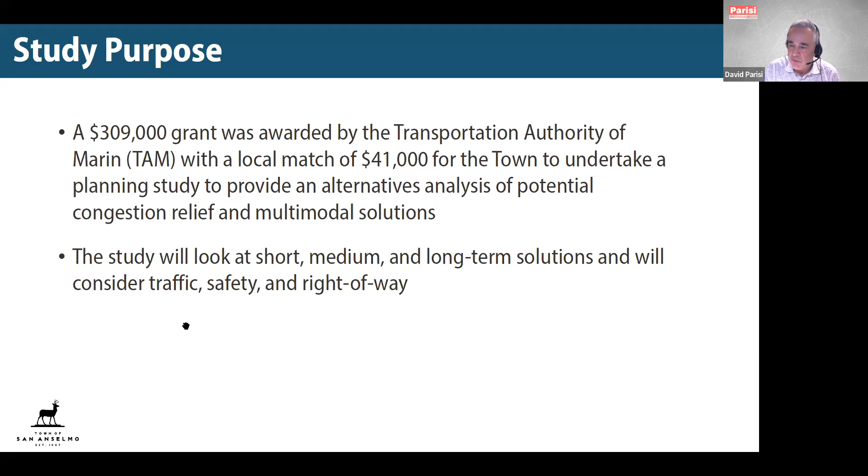At the end of the day, we're looking at short, medium, and long-term things -- concepts that can be implemented in the short term, in the next year or two, as well as a blueprint for future options that may be more expensive and take longer and more funding to implement.

Our goals: number one, to relieve traffic congestion or manage traffic congestion to the best we can, improve pedestrian and bicycle connectivity and safety. We are also looking at public transit improvements, and developing solutions that actually can be implemented, if not in the short term, at least in the medium to longer term.

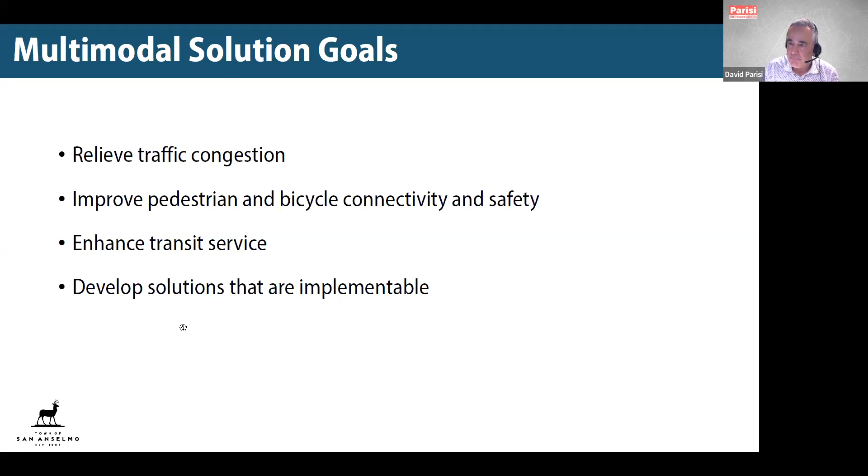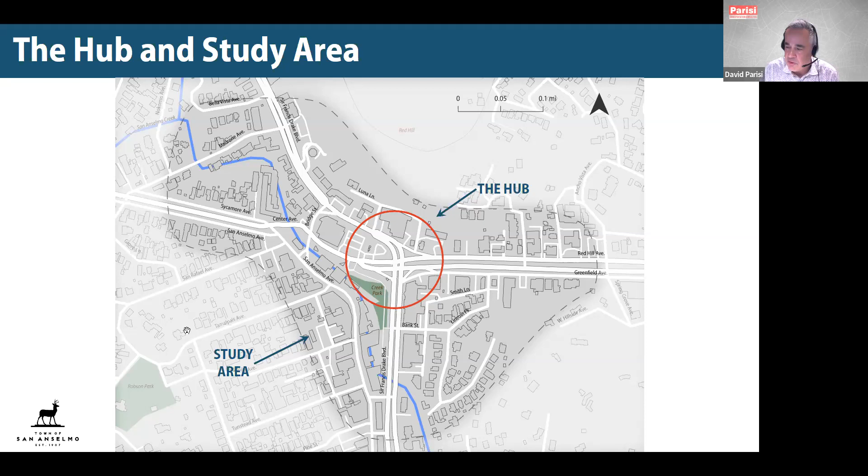This map shows you the hub itself, which is at the crossroads of Sir Francis Drake Boulevard, Greenfield Avenue, Red Hill Avenue, and Center Boulevard. There's also a larger area that we're studying, because we know some traffic avoids the hub today -- not just automobiles, but bikes, pedestrians, and even buses have been rerouted. So we want to understand the effects and the pros and cons of the different options, not just at the hub, but on some of the local streets and intersections as well.

The last time we met was in May of 2021, and that was to really solicit ideas from folks about the biggest issues and concerns, and help formulate the goals and objectives for this study. We have spent the last 9 months very busy mapping the area, understanding where utilities and property lines are, collecting traffic volumes including historic ones, looking at travel patterns, and developing ideas for the different modes and starting to evaluate those. So there's been a lot of work done between the last workshop and tonight.

After tonight, and after your feedback, we'll be preparing a report that will go to the town council for a presentation of some of the findings and near, medium, and long-term recommendations.

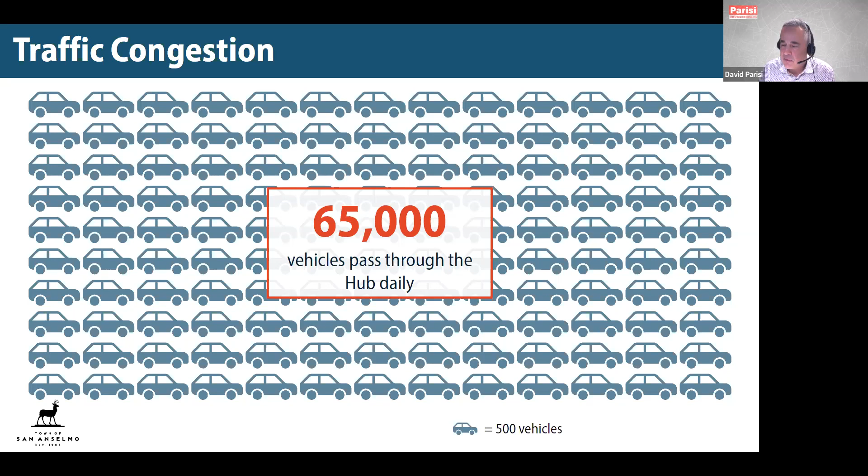Okay, thank you. We're going to recap what we know about the hub with some of the existing conditions for all the different modes. There's a lot of cars that travel through this intersection on a daily basis. 65,000 cars, on our pre-COVID counts, travel through the hub on the 4 legs coming through the hub on a weekday. That's a lot of traffic. In fact, almost 2 times the current population of the city of San Rafael travels through the hub each day.

And it carries so much traffic that we have some little factoids here: about 1.7 times the number of vehicles traveling westbound on the Richmond-San Rafael Bridge, and over 1.2 times the number traveling south on the Golden Gate Bridge. So almost as much traffic as on the bridges.

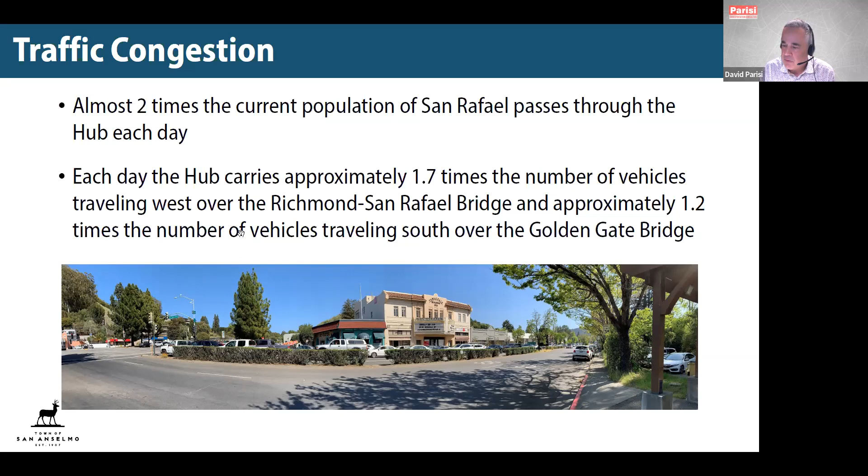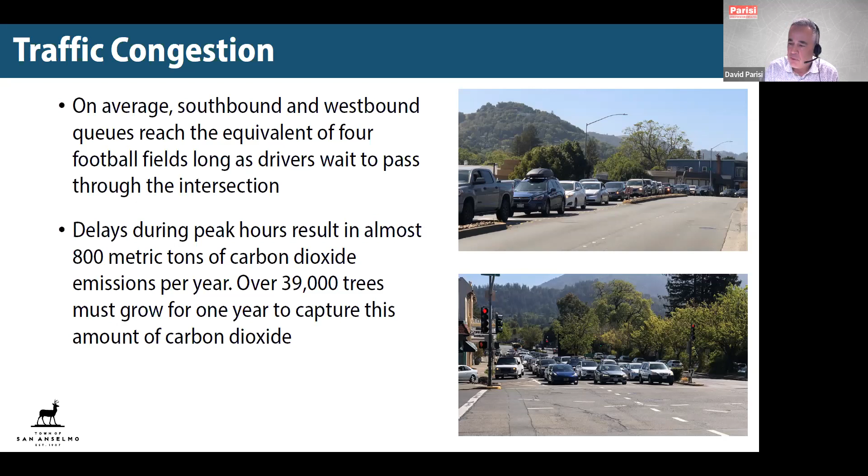We also know that, on average, and sometimes this is exceeded, the southbound and westbound traffic queues reach the equivalent of 400 yards, or 4 football fields, as drivers are waiting to get through the intersection during weekday peak times. This can result in a lot of carbon dioxide emissions, 800 metric tons per year. And if we convert that to the number of trees that must grow to capture this amount, that's 39,000 trees just in a year to capture this amount of carbon dioxide.

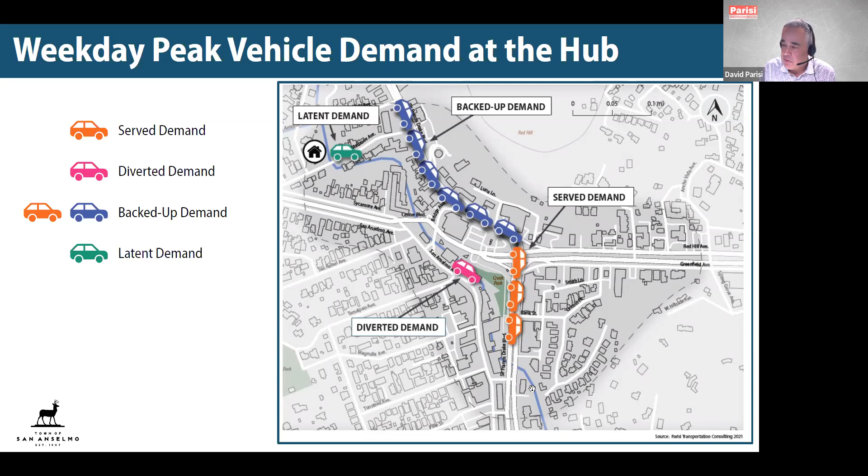As a four-legged intersection with left, through, and right turn movements, it serves 12 different movements. Some of these are bigger than others, and some are controlled with a traffic signal. Others are allowed to make turns on a yield condition, such as the northbound right turn from Sir Francis Drake Boulevard onto Red Hill.

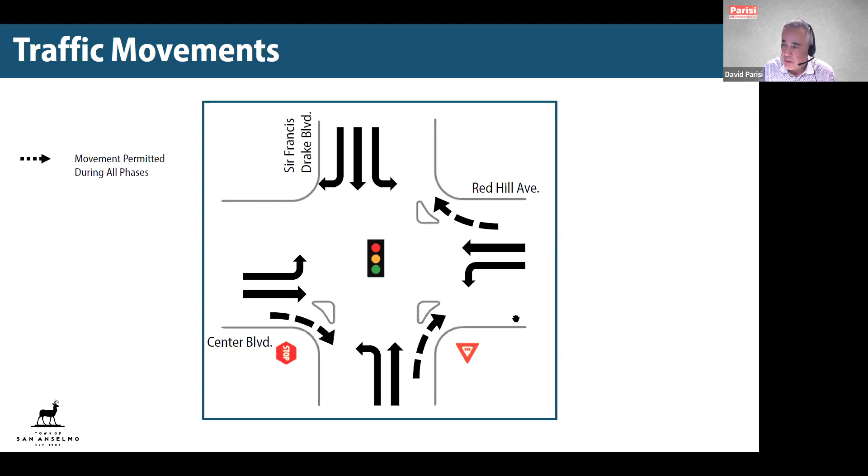The signal phasing is very interesting. Each leg is generally served at a different time and gets a green light. During peak times, it's a 3-minute signal cycle, which is why there are such long delays.

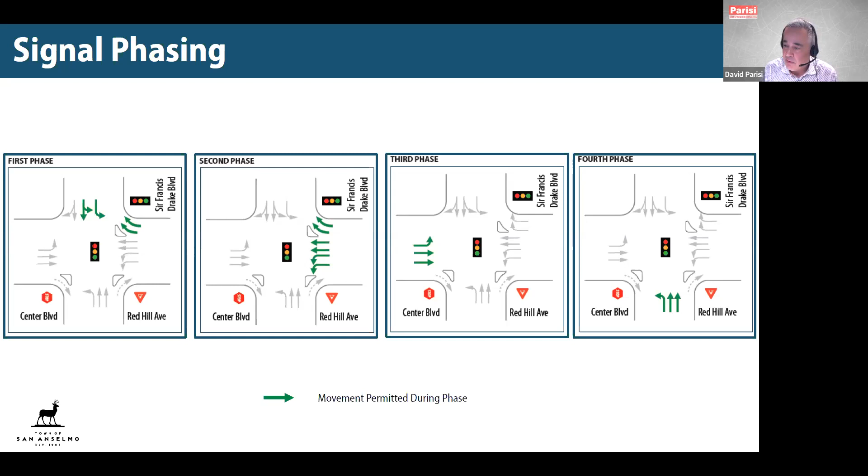It's not possible with the current arrangements and traffic volume mix to overlap turning movements like you see at typical intersections, where maybe both left turns go at the same time, one left turn plus the opposite leg, or through movements that go against each other. It's not really possible to do that at the hub because of the traffic volume differentials and lane configurations, which makes it very inefficient for moving traffic.

We've conducted our own counts and know that traffic flows are different for the different movements. The most substantial flows are shown on the left here - the left turn from Sir Francis Drake southbound onto eastbound Red Hill Avenue, and the reciprocal movement, the right turn from westbound Red Hill Avenue to Sir Francis Drake. Those are by far the largest traffic movements on a daily basis going through the hub.

There are also major flows shown in orange here, which are lesser than the red flows but still pretty big - the through movements from Center Boulevard onto Red Hill. Some of those would probably be making the left turn from Sir Francis Drake onto Red Hill, but have diverted to taking this route instead. And then of course, the northbound movements along Sir Francis Drake. On the last two boxes, there are different lower levels of traffic flows and turning movements shown on these graphics.

The reason we wanted to look at these is because to make the intersection more efficient, it may be beneficial to reroute one or more movements, particularly some of the minor flows, to change the signal phasing or make the intersection operate at a much better optimization.

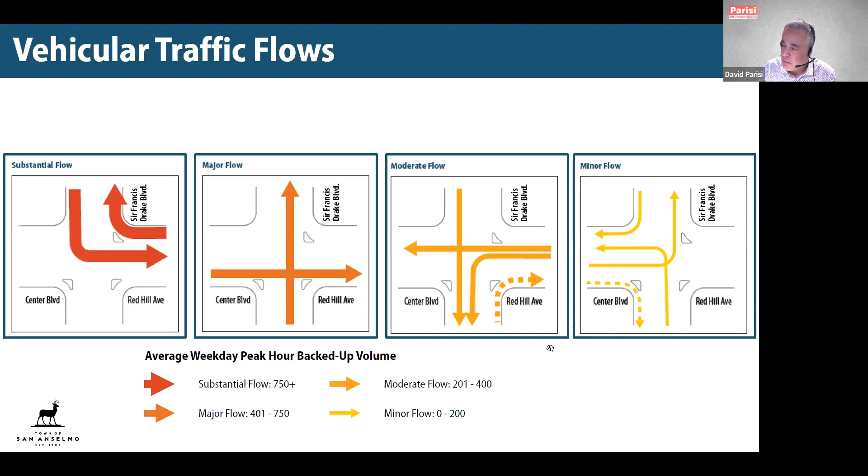We also know, besides traffic, that it's really difficult for pedestrians to cross the intersection here. With 3-minute cycle lengths, you're waiting a very long time. The crosswalks are extremely long, and the waiting areas are very small in the refuge areas. So it can be very challenging for pedestrians.

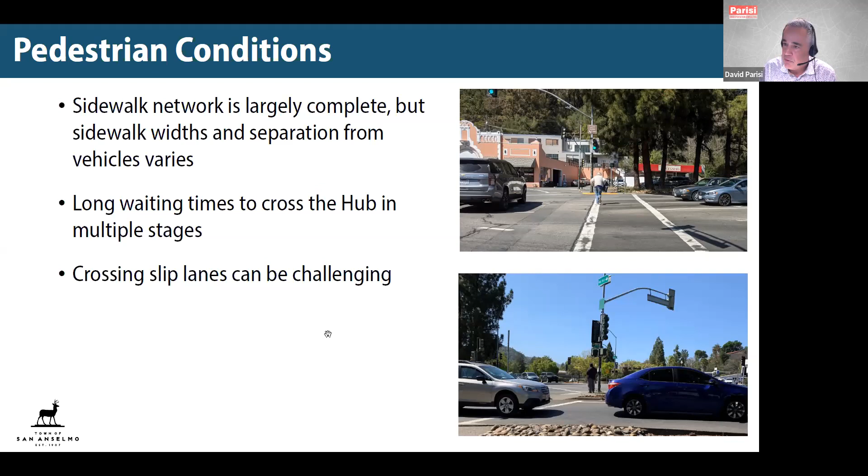And of course, for bicyclists too - there's very little separation between bikes and cars. Just like for pedestrians and cars, there are long waiting times, and it's very difficult - there are no bike lanes except for one small one for eastbound traffic.

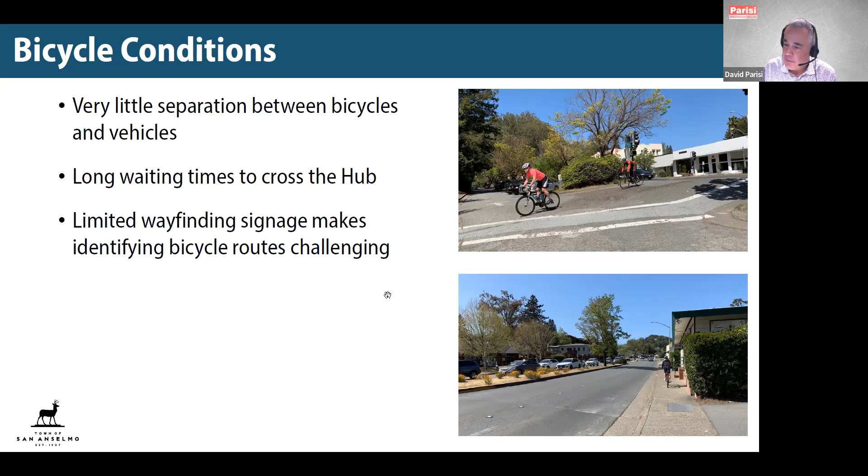Moving on to some other elements of the hub and things we are considering. The Reimagining Creek Park project is a flood mitigation project. There's been a temporary plaza space that was created in spring 2020, and future creek restoration work is planned for this summer. We're taking this into account because there are some options that would abut Creek Park that are very important to understand the interaction.

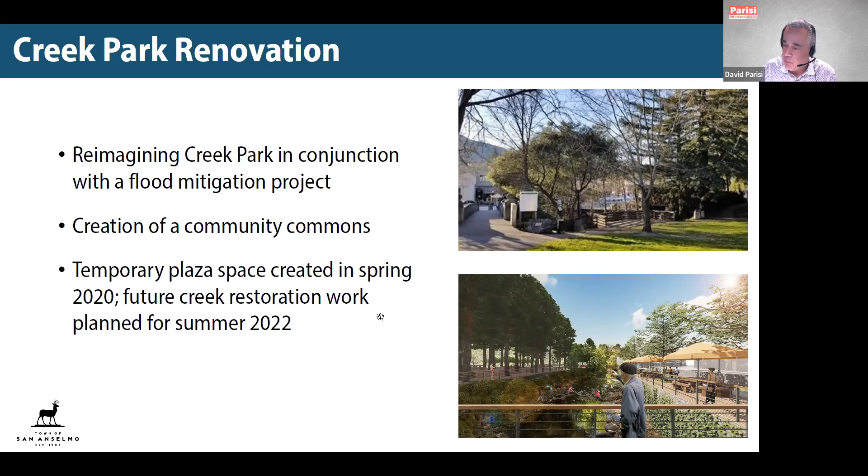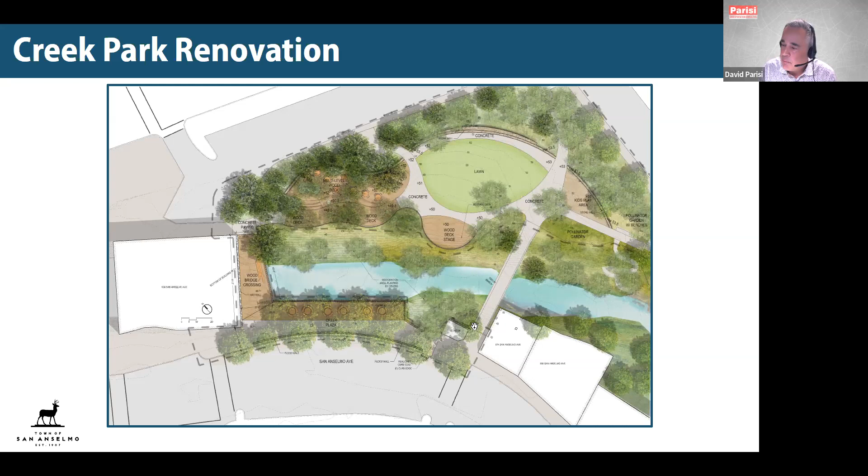Here's a graphic looking down at the future Creek Park renovation. This road up here where the mouse is right now is Center Boulevard. Sir Francis Drake is over to the right, and San Anselmo Avenue is the roadway curving at the bottom. This shows a conceptual plan of how Creek Park is planned to be renovated.

As I mentioned, we had a workshop that many of you were at back last May, and we spent quite a bit of time talking about issues and getting your feedback. We also heard, because we took a poll then, that many of those participants use the hub to shop or dine, work, or reach other destinations. By far, participants identified congestion reduction as a main priority, but of course with other important measures that need to be addressed, including improving cyclist safety and improving environmental sustainability.

There was a lot of interest and some concern about the idea of a potential roundabout - we're going to talk more about that tonight. There was also identification of public transit being something that needs to be improved.

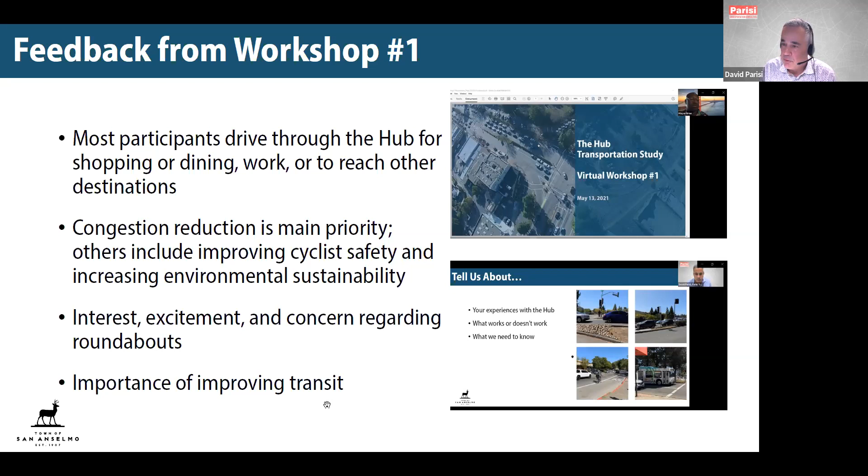So as I mentioned before, moving forward, we've been underway with developing the conceptual alternatives and evaluating them. Here's where we are tonight, and we're going to talk about some of these ideas momentarily.

So now I'm going to move on to what we are calling an improvement toolkit. These are measures that many of you brought up at our last workshop, things to consider. Some of these are other measures that we've identified as having potential for improving multimodal circulation and safety within the hub.

The things we're looking at range from lower cost options, such as updating the traffic signal system at the hub and nearby intersections. This could mean putting in bigger traffic signal heads, upgrading the traffic signal controllers, the detectors that detect traffic, the mast arm poles, and improving visibility. That's one option if the intersection remains signalized. There's a lot of obsolete equipment at the hub today, so that's something we really want to consider.

The next area is what's called an adaptive traffic signal update. This would look not just at the hub, but at the signalized intersections that feed it. Adaptive traffic signal adjusts the signal timing and phasing throughout the day, pretty much instantaneously based on traffic demands. While it may not help exactly during the peak of the peak when we have oversaturation, it can certainly help during the shoulders of the peak in smoothing out traffic flows. We'll be talking more about that and its potential application to the hub.

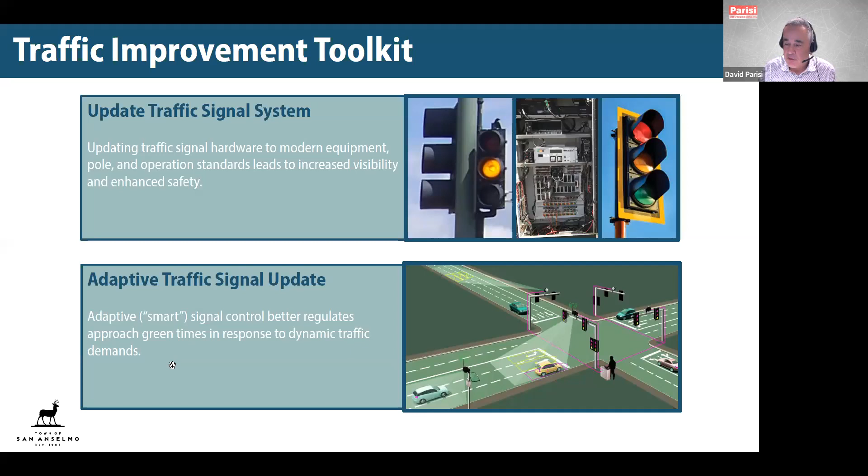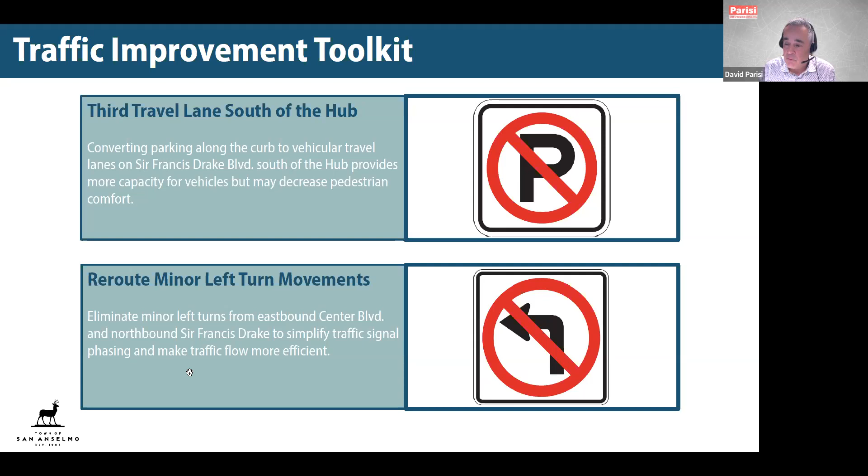We heard some ideas about removing parking and adding travel lanes. For instance, south of the hub, the northbound lane currently has parking removal during peak times, but maybe removing it permanently could provide additional capacity into the hub. Some movements are less busy than others, so we've also looked at rerouting some traffic movements, and we'll show you ideas that can actually improve traffic performance at the hub.

We also heard the idea that, since there's such a big southbound movement, maybe some of that could be rerouted along different streets. So we're going to take a look at that and show you an idea along those lines.

Here's an interesting idea called a displaced left turn concept, where instead of the left turn movement occurring at the primary intersection, it shifts ahead of the intersection to the other side of the roadway. At the key intersection itself, it goes through a different signal phasing operation. It's tough to understand just by looking at this concept, but we're going to show you an idea related particularly to the hub and how it would perform.

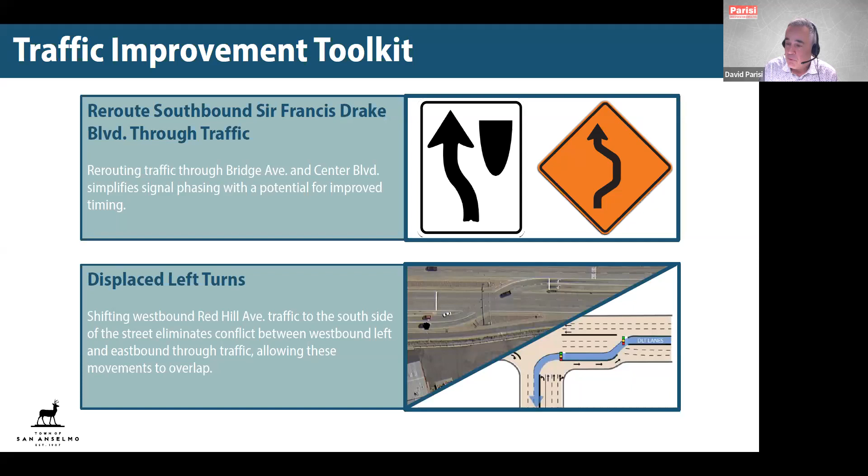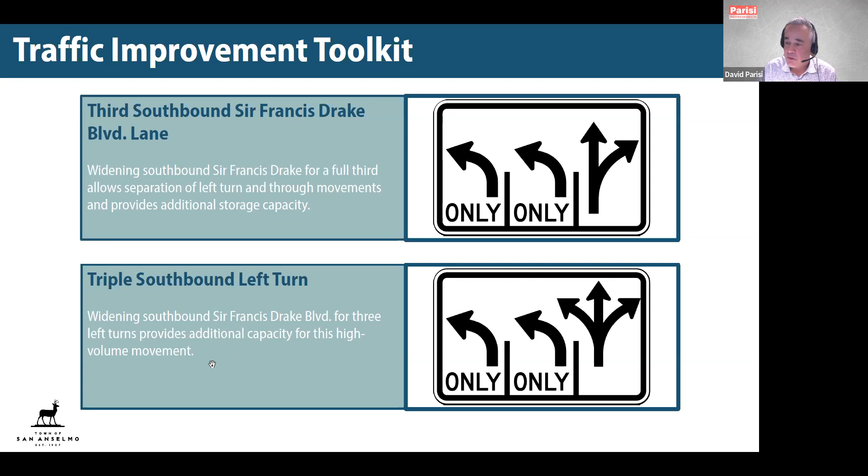That southbound left turn is really large, so possibly the idea of adding a third southbound left turn lane. Today there are two left turn lanes that go from southbound Sir Francis Drake onto Miracle Mile. Perhaps adding a third, a triple left turn lane on the bottom here, and widening on top to provide three lanes to approach the hub. Again, a lot of ideas that we heard at the first workshop, and others we've come up with based on what we know about traffic volumes at the hub.

Of course, in the May workshop there was a lot of interest in providing a modern roundabout. So we're taking a look at that, and we have some things to report about how it would look and function for the hub. Perhaps eliminating some of the legs of the hub and rerouting traffic a bit - we're going to show you an idea along those lines as well.

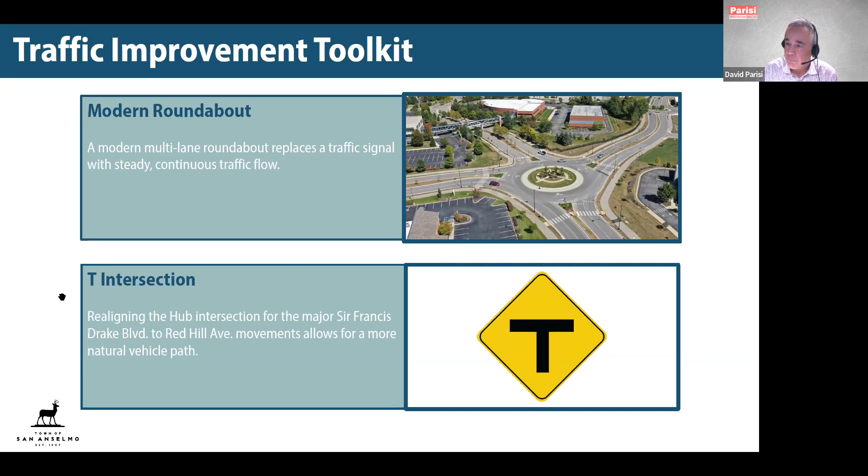We've also looked at a concept brought up during our May workshop, which particularly for the left turn from Sir Francis Drake onto Red Hill would be to grade separate it, either by elevating it or possibly even going underneath the hub. So we'll talk about that. It's something we just wanted to look at as part of the universe of alternatives, so it's an idea we're going to be considering as well. And again, for all of these we're going to want your input, particularly when we overlay them with how they would look if implemented at the hub.

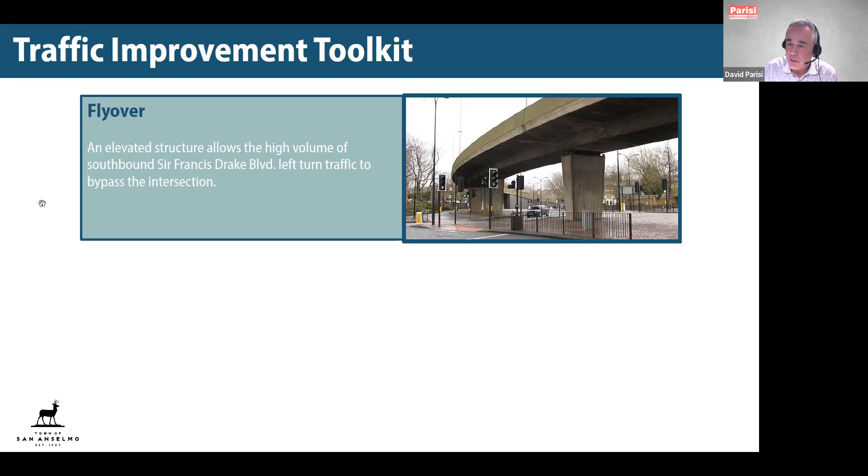But as you know, it's not just about car traffic. There are many impediments for pedestrians and cyclists. So we are also considering how to cross the street safer. This can be through higher visibility crosswalks or shorter crosswalks, and providing things such as beacons that you've seen implemented in various parts of San Anselmo and throughout Marin County.

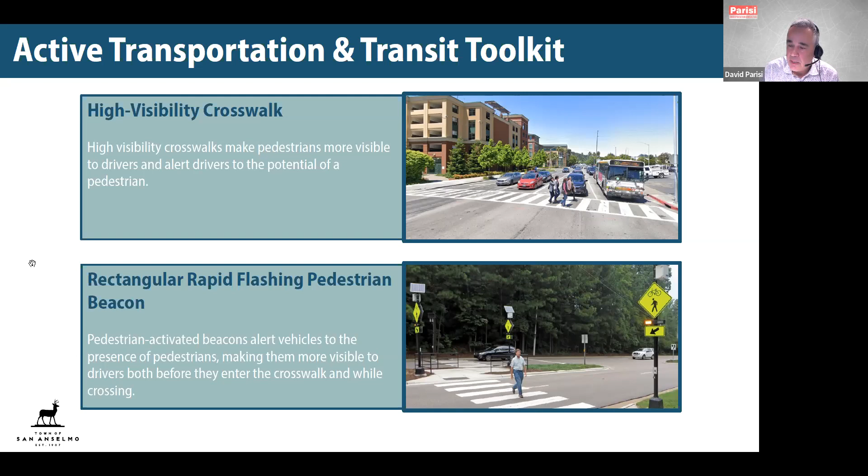There's another type of beacon called a pedestrian hybrid beacon, which is like a traffic light. It actually stops traffic. So these are things we're going to be considering in conjunction with many of the traffic options, or on their own.

Intersection bulb-outs are where we extend corners of an intersection further into the street to improve sight distance and visibility between pedestrians and motorists, but also to reduce the length of a crosswalk.

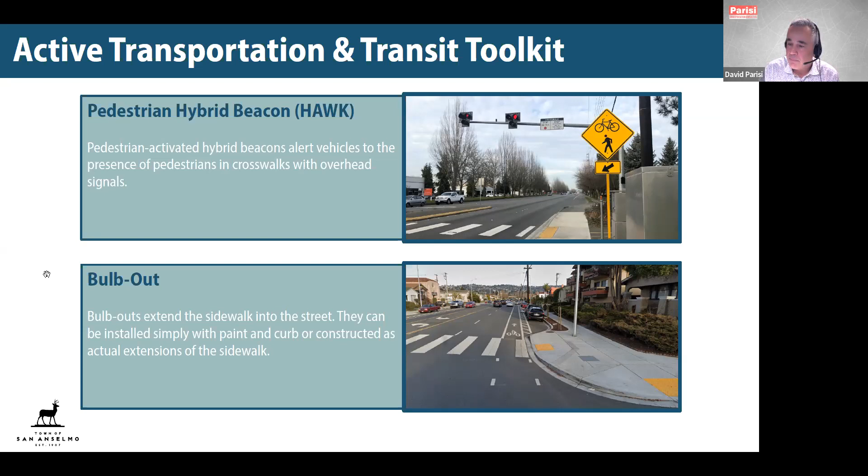We have several slip lanes, right turn slip lanes, at the hub, where cars can have their own lane, and in some cases they can yield or they stop before they turn onto the street. Perhaps repurposing them by eliminating them or making them into something else. So we're going to be looking at some ideas for how to handle the right turns and provide better pedestrian safety.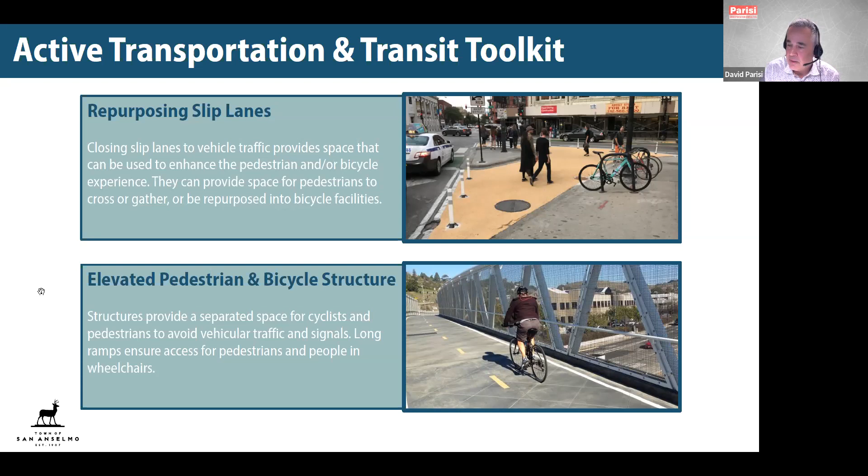We also got some feedback at the May workshop about how there's not as many bikes and pedestrians using the hub now because it's tough to get around. If we provided an elevated structure and separated the modes altogether, perhaps that should be considered. So we've taken a look at that, and we have some ideas along those lines as well.

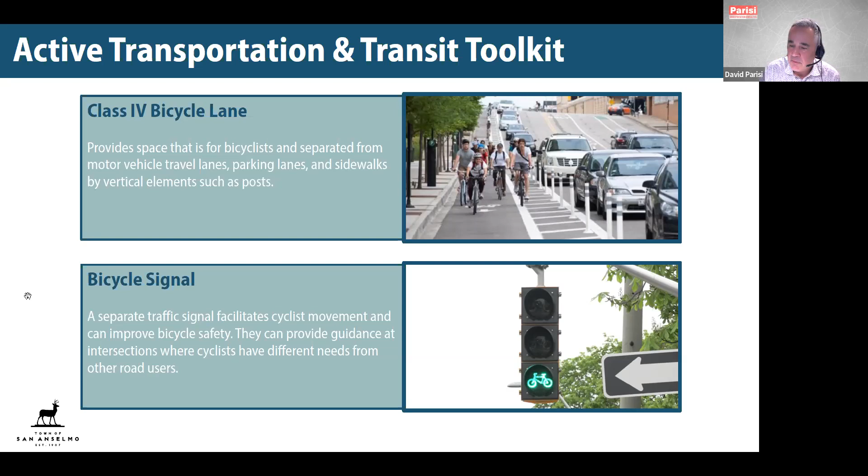Class 4 bicycle lane is a new type of bikeway that is more separated than a regular Class 2, which is typically separated just with paint. Class 4 bikeways can be one-way or two-way, and they can have different types of separation. So we have some ideas we want to discuss with you guys tonight. We want to look at things such as bicycle signals and other ways to provide better movements and safer separation for cyclists.

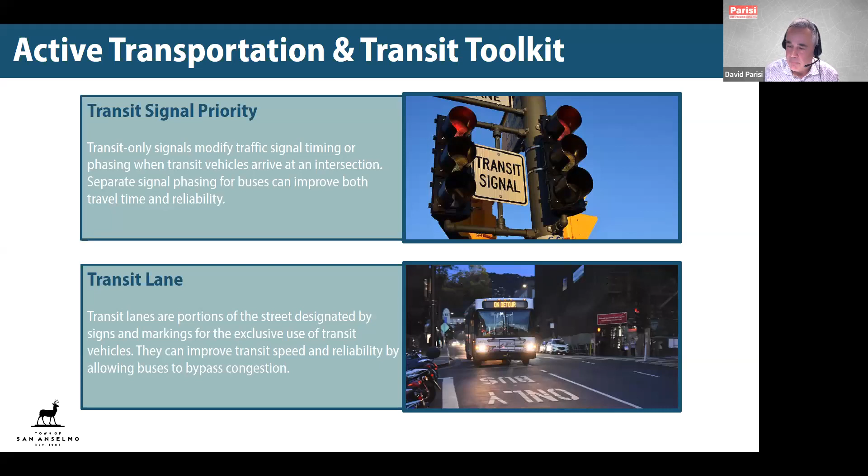There are a number of bus routes that go through the hub. Some recently have changed their patterns because the hub is so congested. So we are also going to be looking at what we can do with traffic signaling for buses, where they get their own signal, or perhaps a transit-only lane to make a left turn or a movement through the hub. So these are on the table as well.

All right, so there are some other ideas. These are just some concepts that we've heard, we've thought about, and we wanted to apply to potential application at the hub itself. So with that, I'm going to go through and discuss different concepts for traffic and transit, and then for active transportation. We will come back to these because we really want to get your feedback on the different concepts, and perhaps there's something we didn't think about, and we'd love to know that.

First, just to keep it simple for tonight, the performance measures we are reporting for the traffic options really have to do with delay reduction—how much can they really reduce the traffic delay on a percentage basis compared to what people are experiencing today. So for the transit and traffic options, we're going to be giving you a range for each option of what we think that alternative could do as far as reducing delay. We're also going to be providing a relative cost for all these options with a dollar sign symbol, from one dollar sign to five dollar signs, shown on the right here, to give you a relative idea of what the cost would be to implement each of these measures.

Going back to the middle symbols here, for the bicycle and pedestrian concepts, we are just giving a simple range of level of comfort for the users, one star to three stars. I think it'll become pretty apparent which ones are one stars, which are three stars, by the level of separation and convenience for the different users.

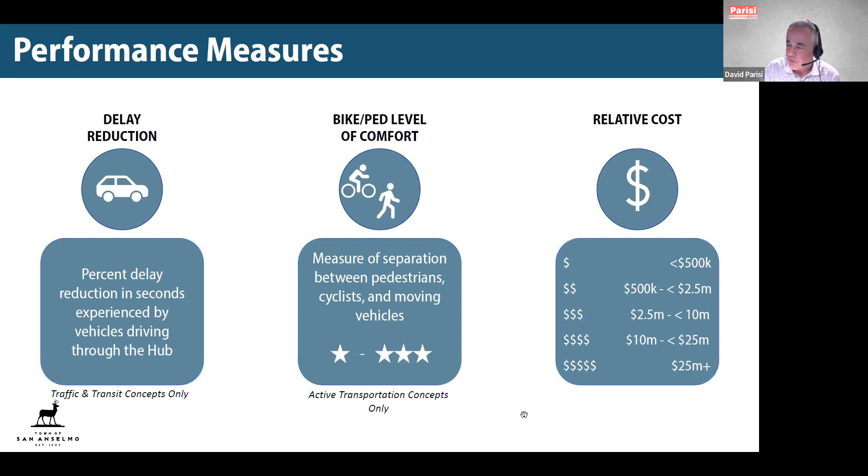So without further ado, I'm going to start walking through the different concepts. And again, at the end of this presentation, I'll come back and show you a menu. But we really want to hear from you guys tonight about your thoughts on these different concepts.

First off, adaptive signal upgrade, if it's applied at the hub and nearby intersections, as I mentioned previously, it'd be putting in new conduits underneath the roadway, detectors, really sensing the traffic all day long, weekdays and weekends, to try to adjust the traffic signals. Now, as I mentioned previously, anytime you have an intersection that's oversaturated, it can't do much. You can only do so much with traffic lights, but during the shoulders of those peaks, we can help even out the traffic flow and make things better. So that's why we're showing in the performance box on the bottom left here that the overall delay reduction would probably be about 5% or less. And the relative cost is two dollar signs on a scale of five dollar signs. But again, something that could be done relatively quickly compared to some of the other options that I will be sharing with you.

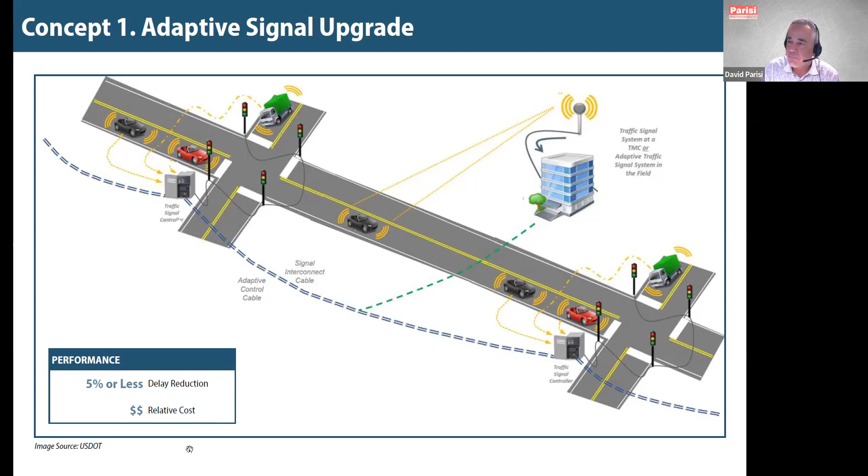The rest of the options tonight will be compared to the existing conditions map, which shows Sir Francis Drake Boulevard on the southern leg shooting off to the northwest, Red Hill Avenue, Greenfield Avenue, and then Center Boulevard. Each map will show slightly different variations from this.

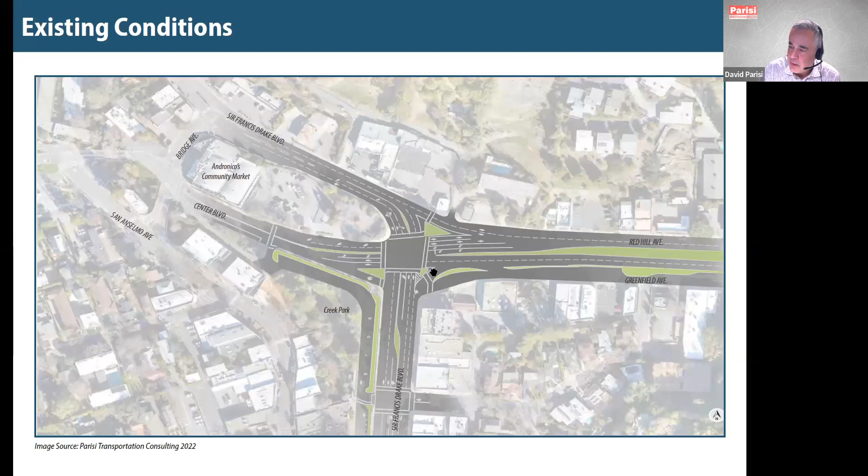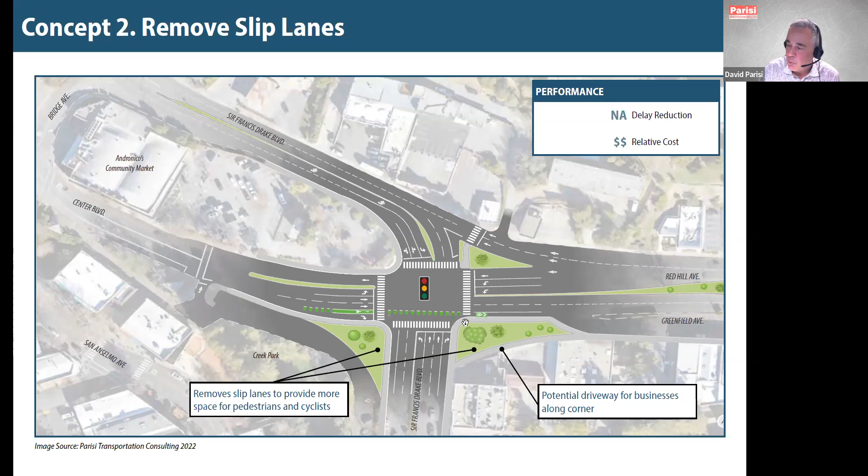Option 2 is where we would remove some of the slip lanes. There's a slip lane on Center Boulevard, stop sign controlled, for an eastbound right turn onto southbound Sir Francis Drake, and another from northbound Sir Francis Drake onto eastbound Red Hill. One concept is to fill those in and make turns more difficult for vehicles, which doesn't help delay reduction, but can provide safety for pedestrians and bicyclists crossing the street. From a traffic perspective it wouldn't provide congestion relief, but we thought it important to explain.

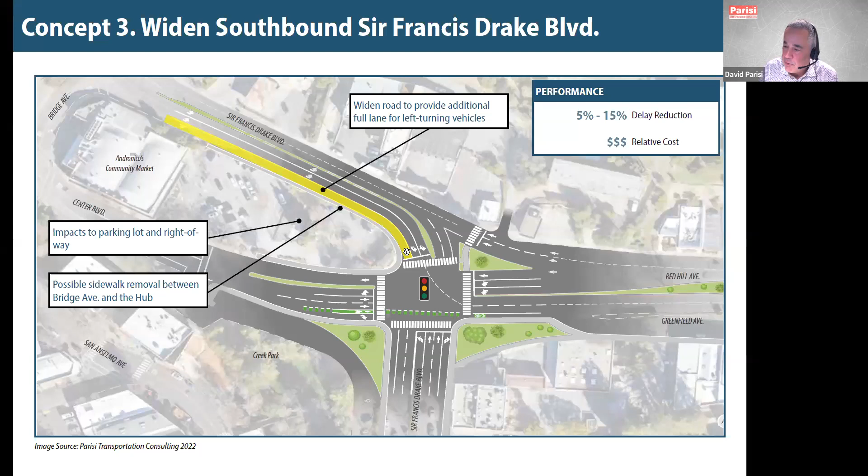We're going to show you 8 or so different concepts, so it could get a little confusing, and we'll create a little index at the end so we can come back to any of these during questions and answers.

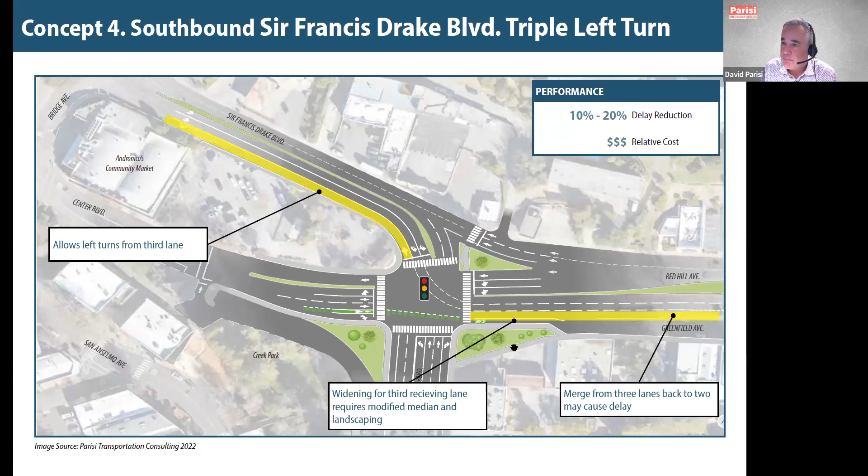The 5th concept was the idea that the through movement coming from Sir Francis Drake onto Sir Francis Drake could be eliminated by modifying the roadway geometry, which would provide a big reduction in delay, also about 5 to 15%. But that traffic has to go somewhere, most likely down Bridge, requiring reconstruction of part of Center Boulevard and signalizing with a higher capacity right turn onto Sir Francis Drake. It's a concept we were asked to look at, based on feedback from our first workshop. It could provide benefits, but the impacts would be pretty large because of bypass traffic using Center Boulevard.

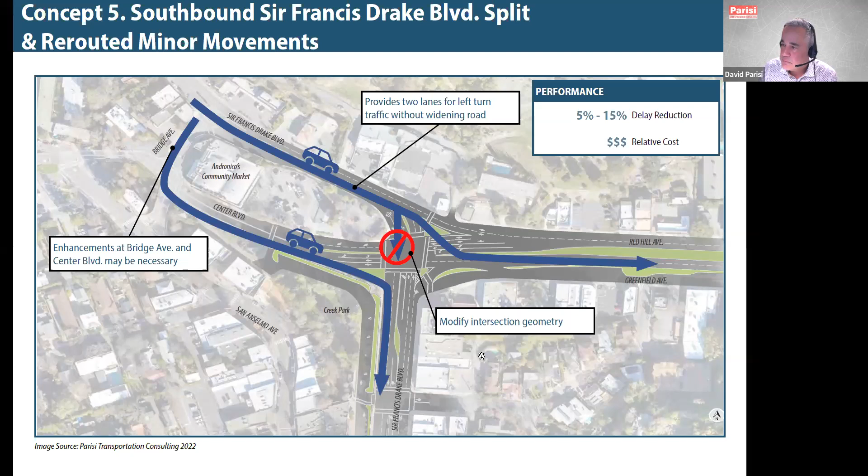Concept 6 is where we would combine the idea of a T intersection on the north side with a typical intersection just like 100 feet south of it at the hub proper, and change some of how the movements work at the intersection. This is where we'd employ the idea called the displaced left turn.

Just to the east on Red Hill Avenue, there would be another traffic light. Let me show you how this would work with a more enlarged figure. Under this concept, traffic going westbound on Red Hill that wants to go onto Center or southbound on Sir Francis Drake would cross over a few hundred feet to the east of the hub and line themselves up here. That would take that whole traffic movement out of the northern part, or the big traffic movements at the hub itself.

How that would work is that eastbound traffic traveling along Red Hill would also crisscross at this point, again through a traffic light, and continue on as eastbound traffic. This type of improvement has been used at various locations throughout the US with really good success. The option would have pretty substantial delay reduction, about 15 to 25% compared to current conditions, but a higher relative cost than the other options we showed earlier, primarily due to the amount of construction required and phasing the project while keeping traffic going during construction.

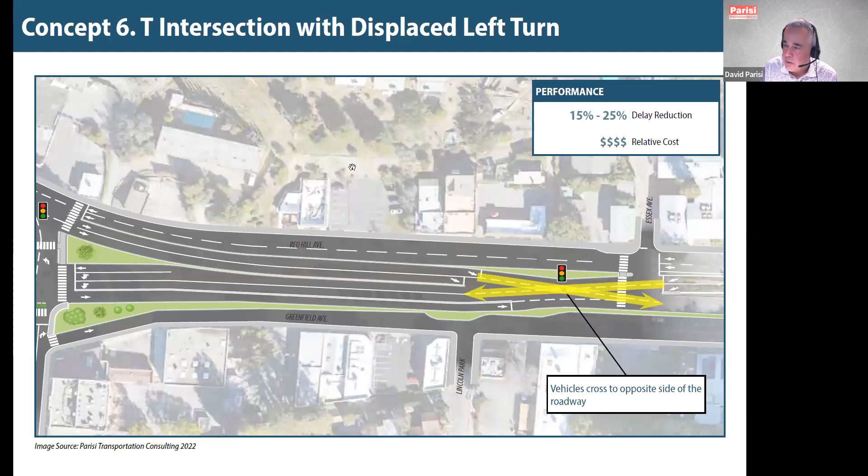Okay, two more. Here is an idea of a modern roundabout. We've spent quite a bit of time looking at a layout and how it would work, how it would function, and how it would have to look at the hub. We determined that a roundabout actually could fit within existing right-of-way. We'd have to refine that and confirm it, but so far it looks like it would fit within the existing footprint of the hub.

It would have to have a configuration somewhat similar to what you're seeing here in this image. In other words, it would have multiple lanes through the roundabout itself because of the heavy traffic volumes we see at the hub. Of the 4 different quadrants of the roundabout, 3 would have 2 lanes and 1 would need to have 3 lanes. The western part of the roundabout would have to have 3 lanes, due to the heavy left turn movement from Sir Francis Drake onto Red Hill.

How roundabouts typically work for pedestrians and cyclists is that these movements are often separated one or more car lengths away from the roundabout. These could be done as shown here with high visibility crosswalks and splitter islands, possibly even some of the beacon treatments I showed earlier, or overlaid with other treatments we're going to show where we can separate bicycle and pedestrian movements. This is exactly how a roundabout would probably need to look for implementation at the hub.

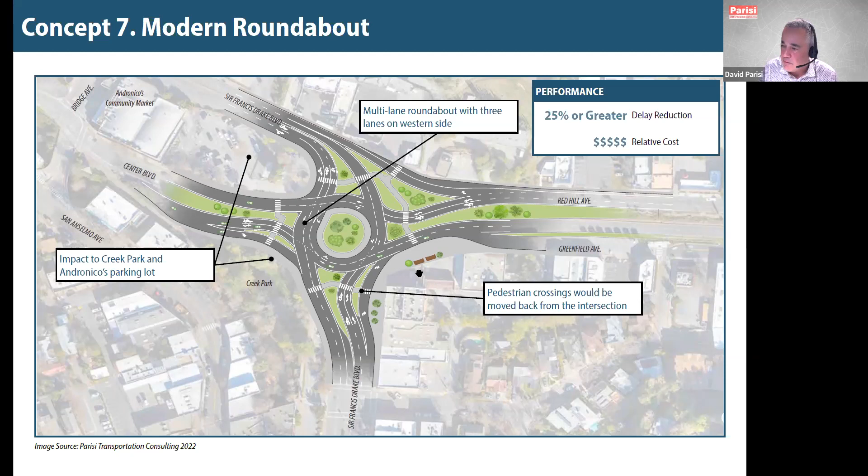And last but not least, tonight we're going to show you a flyover concept, which would completely separate the left turn traffic from Sir Francis Drake onto Red Hill with an above-grade structure. It would need to be about 1,200 feet long, about 30 feet above the roadway, with a shoulder for vehicles that may break down. It would bypass the intersection entirely, and it would have the highest degree of potential delay reduction since this movement would never need to go through the hub itself.

Of course, there would be visual effects with an overcrossing, and we'd love to hear from folks tonight about their thoughts on that. It would certainly affect the Andronico's parking area here, and we'd need to provide some structure. So it would be very expensive — a high degree of delay reduction possibility, but with some visual impacts.

I do want to mention, we also looked at the potential for going under the hub, which would be very similar to this, but underneath. That would be a $6 sign, because it would be very expensive — there'd also be water table issues, so that's something we can discuss more. It's comparable, but more expensive than an overcrossing, plus there are major utilities underground that would need to be relocated.

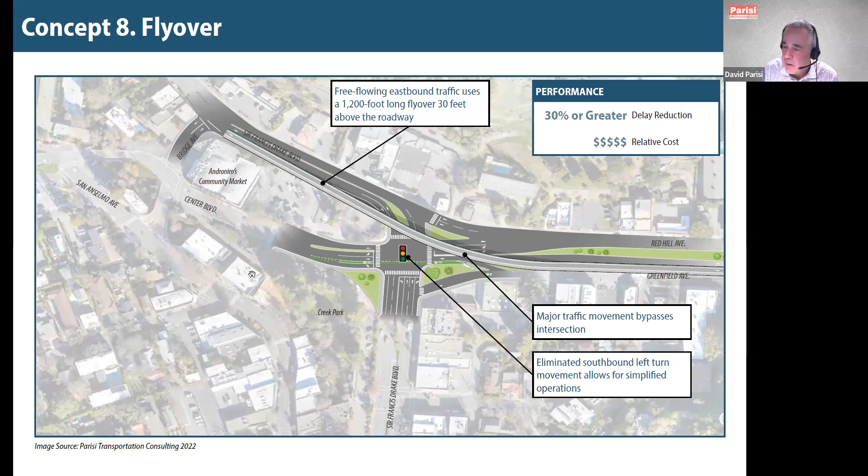Okay, I'm getting close to wrapping up on the traffic concepts. Just a quick summary — we shared with you 8 different concepts, along with the potential delay reduction for vehicular delay, and the relative costs, ranging from 1 sign of under $500,000 to 5 signs of $25 million or more. We've been doing some cost estimates, and when we take a break in a few minutes, we're going to want to hear from you about your thoughts on these different ideas.

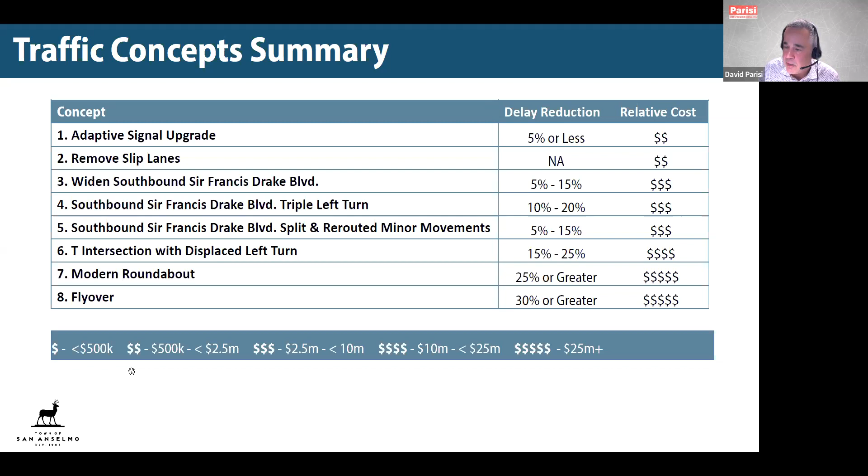With that, though, we're going to move into a poll. Jen, do you want to administer that and let's get some feedback? Yeah, pulling it up right now — we'd just like to hear real quick what concepts you're excited about from what you just saw. You can choose up to 3. This is just an informal poll — we have up to 50 people participating, and we just want to get some feedback tonight. There's plenty of time later for questions, observations, and your feedback.

About half of you have participated so far. Now about 75% participation. Let's give 15 more seconds, Jen, and then let's do a recap. Again, this isn't statistically significant, but it's interesting to see what folks are thinking.

Thanks, Jen. Excellent. All right, let's continue on, because now we're going to talk about some of the active transportation concepts. What we mean by that are ideas that can overlay with the traffic and transit concepts we just showed you, but these are ideas to improve pedestrian and bicyclist connectivity and safety.

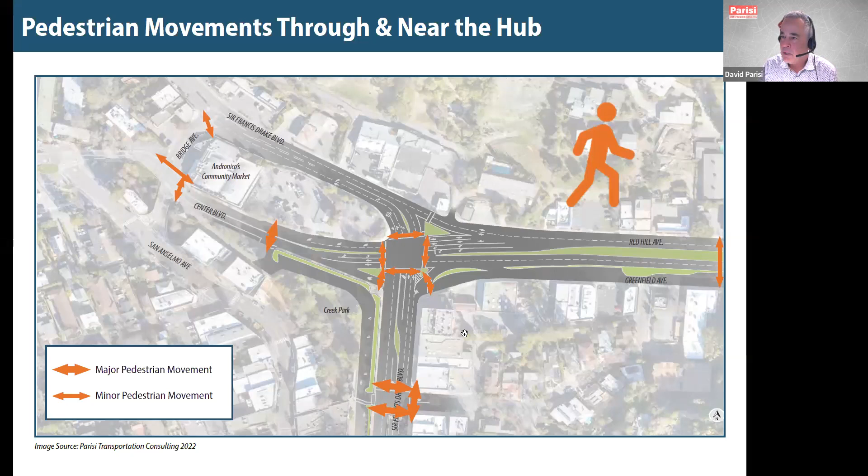First off, what we do know currently about pedestrian movements is that there are different ways people want to get around the hub and cross the intersection or nearby intersections. You can see from these double-sided arrows some of the major pedestrian movements versus minor ones. Right now, we don't see lots of pedestrians crossing at the hub itself — as I mentioned, long cycle lengths make for pretty intimidating, super long crosswalks. But we do know a lot of folks cross at Bank Street, or on Center in front of Andronico's. This is bound to change under different concepts, so this is just a snapshot in time about what we know about pedestrian movements today.

Similarly, the bicyclist movements are almost literally all over the map. For instance, eastbound bicyclists use a little bike lane on Center that some use to cross eastbound and then get onto Greenfield. Conversely, some bicyclists actually cross through the crosswalk going westbound through the southern crosswalk. Many cyclists use Greenfield and some streets just east of the hub to travel to Bank and then cross onto San Anselmo Avenue or go down to Tunstead, and vice versa. So those are some of the movements we know about today, and we know there's heavy east-west bicycle demand.

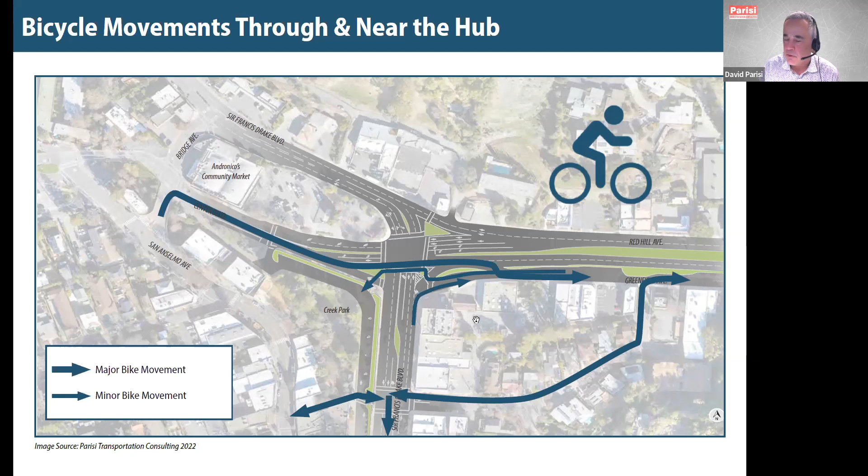We've also looked at some ideas that are incremental, similar to the traffic ideas, where we looked at lower cost alternatives first to see what could make sense. Near-term improvements could include providing better crossings at the hub, installing beacons in some locations, putting in high visibility crosswalks, and pedestrian hybrid beacons that stop traffic altogether at different locations, including at Essex and maybe Madrone. Relatively, these would be low cost, but from a pedestrian comfort standpoint, just 1 star out of the 3 we're using to rate these options tonight.

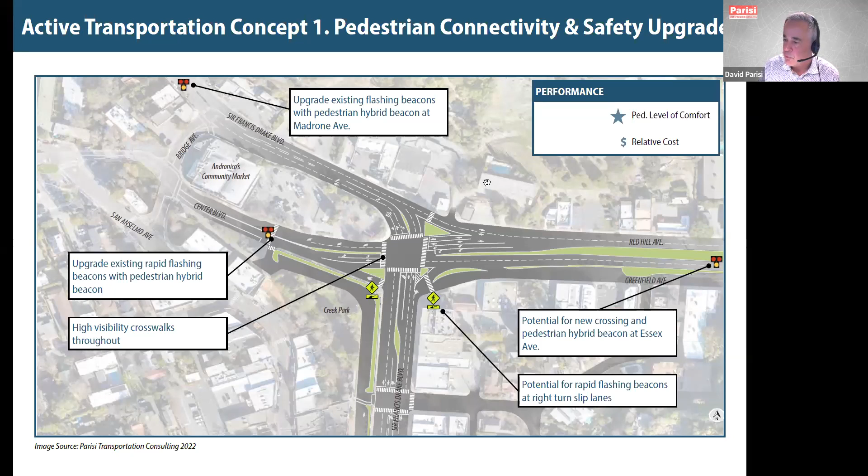Concept 2 you've seen before. We showed you that earlier in the traffic concepts, where if nothing else was done to the hub except removing some of the right turn lanes and repurposing them, this is how things could look. It would mean pedestrians and cyclists wouldn't have to cross free-moving right turns, and they'd be afforded shorter crosswalks and crossings. So again, something that could be done. It would definitely negatively affect traffic flow, but for 2 dollar signs relative cost, it would certainly improve pedestrian and some bicycle level of comfort as well.

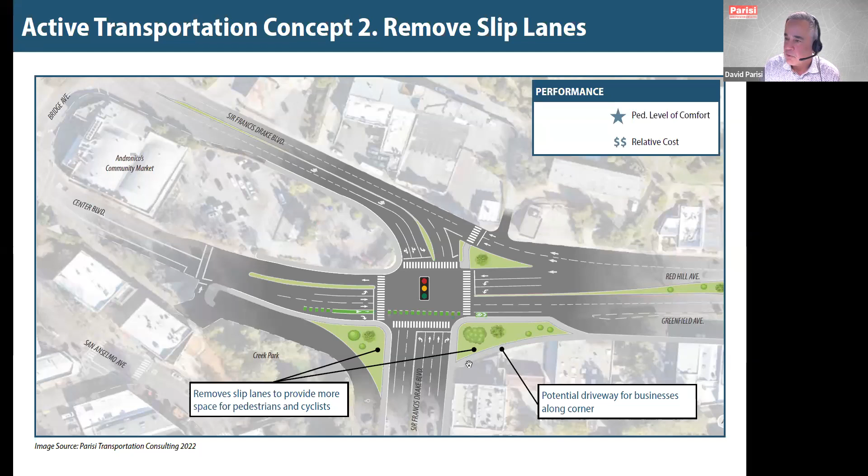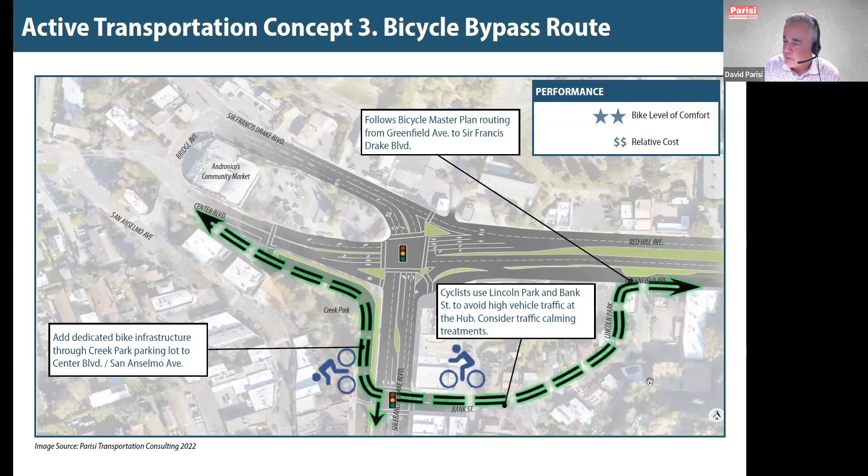Our third concept is focused on cyclists and the possibility of providing a nice 2-way bikeway from Greenfield through Lincoln Park, Bank Street, using a bike traffic signal at Bank and Sir Francis Drake, converting some parking area, which we'll show you in a moment, into a 2-way bikeway all the way up to Center and Bridge with some dedicated bicycle infrastructure. Really interesting idea. It would include some traffic calming on the streets to the east as well. We're showing this because we think there could be some dedicated bikeway facilities here. So 2 stars for bike level comfort, 2 dollar signs for relative cost, because there would be some infrastructure improvements needed.

This is the same concept, but showing what it could look like by converting some of the parking area just to the east and north, in Creek Park. This would require converting diagonal parking into parallel parking, so about half the parking spaces would be displaced. Perhaps that could be managed with different parking regulations in other parts of town. It would provide a 2-way bikeway, which doesn't exist today, configured with a dedicated east and southbound bike lane and a shared north and westbound bike lane all the way to Center Boulevard. There are some promising ideas here that could be done maybe in conjunction with future park phases or as a standalone project.

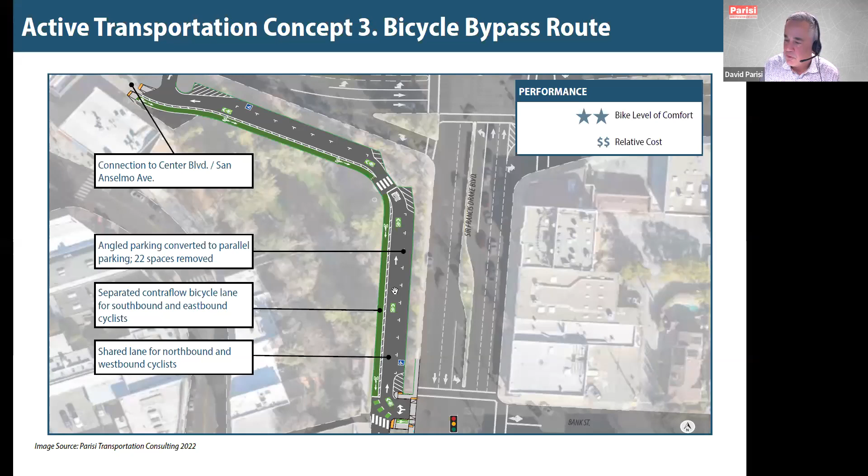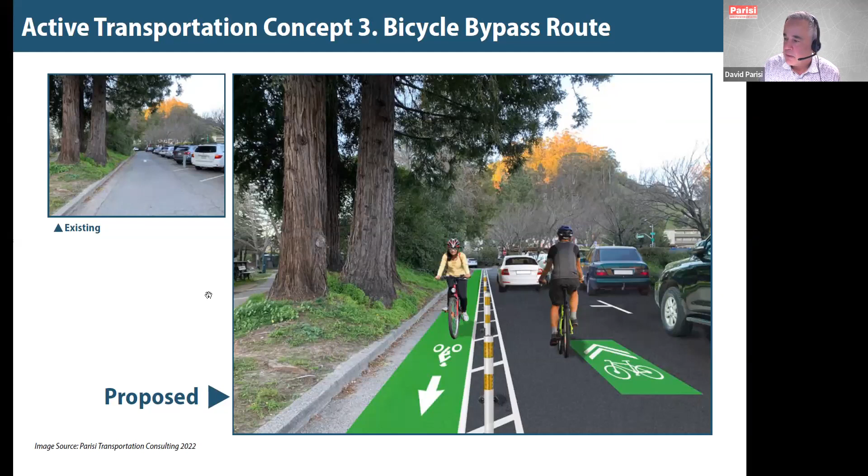For this same concept, we've developed a before and after rendering. The photo on the top left is looking through that parking area today - it's a 1-lane northbound with diagonal parking. This is a photograph we took just last week showing what it looks like now. And this is a photo simulation on the right showing how it could be converted to provide bikeway access. We'd love to hear about this tonight and get people's feedback. This would not be a huge lift - it would cost several hundred thousand dollars to implement, but again, something that could be very possible.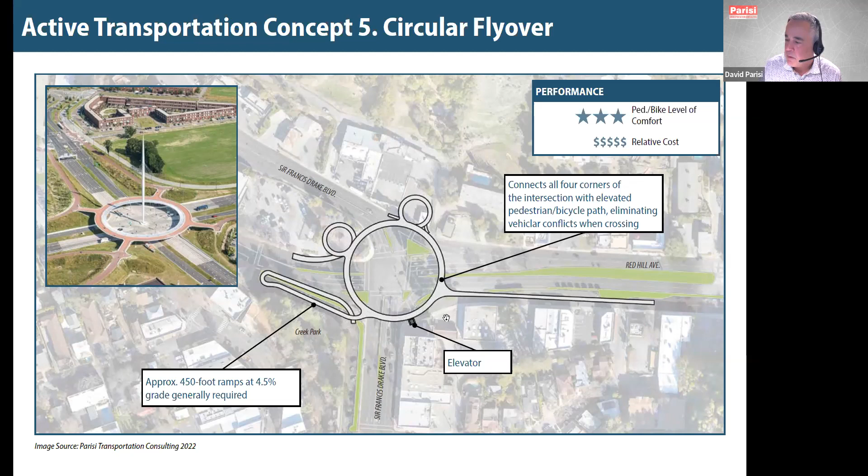There'd also be opportunity for elevators or stairs as another option. So this is something we've taken a look at. It would have a very, very high cost, but it would provide accessibility to all the different quadrants of the hub.

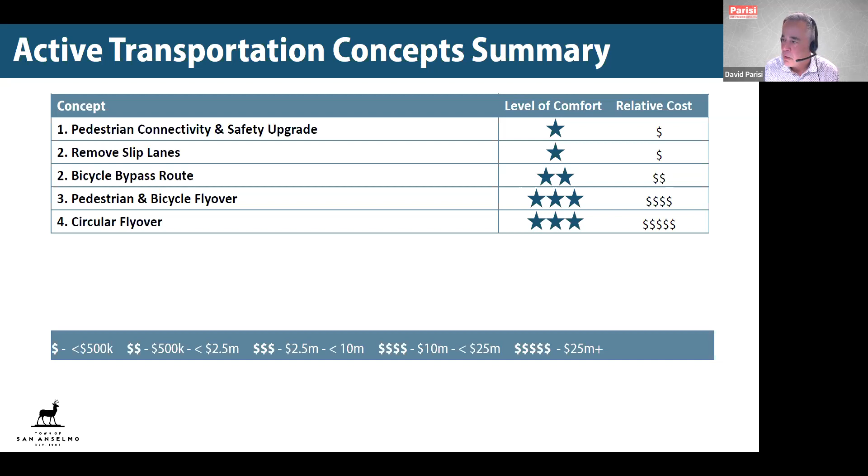So we're wrapping up here. We're going to do another poll in a minute, but real quick, to summarize, we've come up with 5 general concepts for pedestrians and bicyclists. They all have different levels of comfort in ascending order, and relative cost as well. I think with that, we're going to do a poll and get some feedback, then open this up for questions and general feedback. Go ahead, Jen.

All right, so this time, everyone, tell us which concepts out of these active transportation concepts you're excited about. Please feel free to choose up to 2 of these concepts that you are excited about.

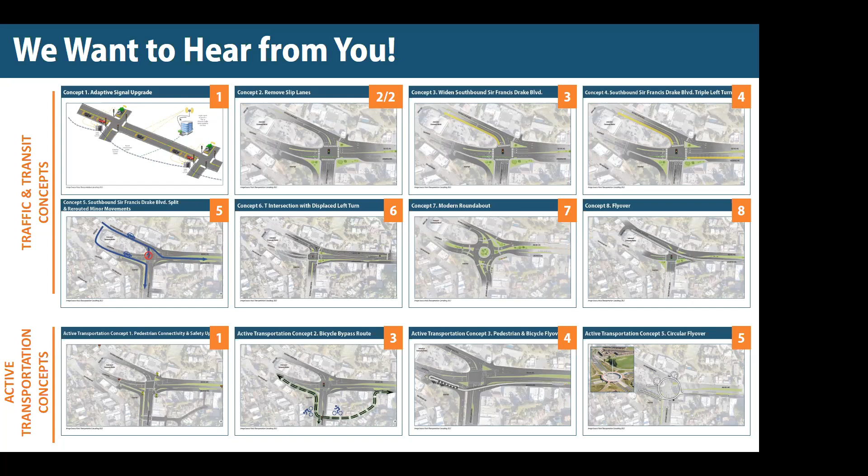Very impressive. I really like all your fat and thin arrows to show the volumes of traffic, both pedestrian and vehicular. It's very useful, thank you. I have a question. I can actually do bicycle concept 3 right now, coming from San Rafael and going towards Fairfax. But no matter what I try to do, I can't really get out onto San Anselmo Avenue without getting off and walking across a bridge, or it's very dangerous and difficult to cross Center Boulevard mid-block, even with the flashing light, which I really appreciate. And it's far worse on a bicycle. So I'm just completely confounded by ending on Center Boulevard.

So if you can find a way to route through the new parkway onto San Anselmo Avenue, I would really be more interested in that. And I don't know about losing all that parking next to the park. That seems kind of precious, but anyway, I can already do that the way it is. I don't need a lot of money spent to do that, but I would like money spent to get me down to San Anselmo Avenue.

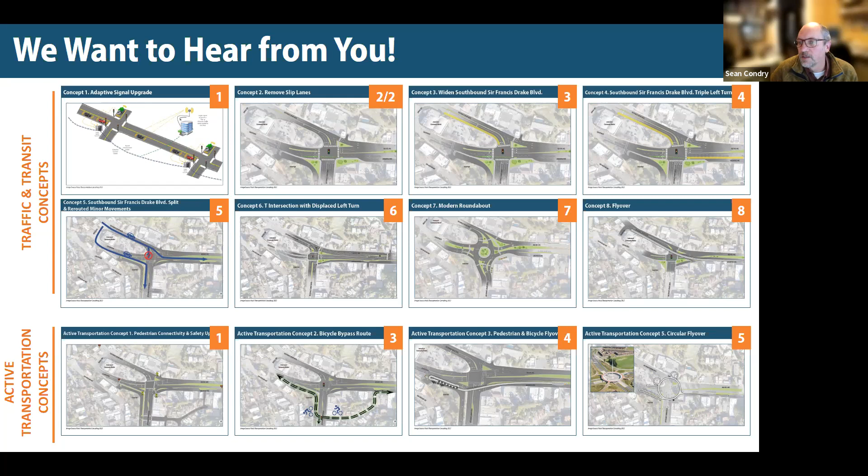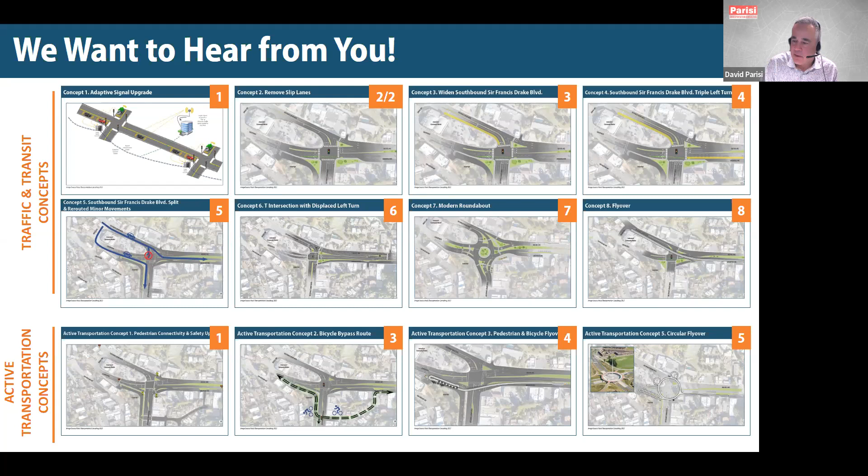Perfect. Okay, yeah, and just to wrap up again, thanks everybody for your feedback. There's been a lot of hard work, and a lot of these ideas came from you. And again, we appreciate all the input on the different concepts. The next steps for the project is to take this feedback and mix and match and try to come up with the recommendations for short, medium, and long-term solutions or options that can be considered by the town council.

We're going to take a closer look at some of the potential construction costs after we kind of mix and match and blend things together. And then our scope of work is to prepare a report and a presentation kind of summarizing the results and bringing this presentation back to the town of San Anselmo's town council to discuss the findings and the recommendations. I think that's a couple months off, and the public will be well notified about that, so you can come and make further statements and comments at that time.

Of course, then it'll be as far as trying to figure out what are the priorities and where the funding can be found. And we hope to work with Shauna, Scott, and Dimitri and the town on that to try to make some of these ideas a reality. And Dave, I'd just like to thank you, and I know Dave Donery, the town manager, for the great presentation to you and Jen and Mac. I think it was a really good, informative presentation. So thank you. I don't know if Councilmember Colbert would like to say anything to close out.

Yeah, sure, Sean. No, again, I want to thank you and your whole team, Dave and their whole team, for the valuable and good work that they brought to this. I do want to acknowledge that Mayor Fineman joined the Zoom, as did Bill Whitney from TAM. I know he was instrumental in partnering with the folks here on the call in providing some of the hard data. I think we've really continued to lay the foundation to think about the future. I really enjoyed the emphasis on mobility. I think it's really important that we continue to focus on our school kids and pedestrian access. And the last thing I'll appreciate is the big vision and the thought, right? We haven't touched the hub in many years, so we should really be thinking about what will the future of transportation and mobility look like.